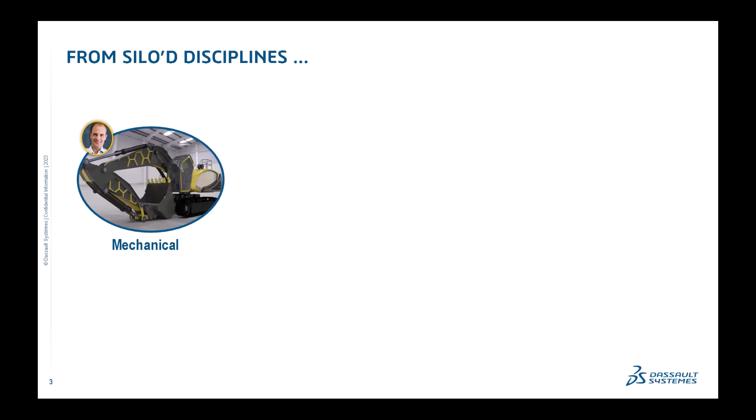Now, let's assume that you are working in an automotive or industrial equipment company, and let's say you are on a project along with some of your colleagues. In this project, there are mechanical engineers to take care of all the simulations related to your product structure. There is also drive, battery, and electrical system engineers, and also a couple of other people working on the same project.

The question is, how are all these people going to work and collaborate? Well, usually the answer is that they are probably going to work in silos, meaning that each and every one of them is going to work on his side with very limited interactions with the others. There are a lot of problems coming with this way of working, for example, integration issues, data loss, many iterations, long cycles. Generally, this is not a very efficient way of working.

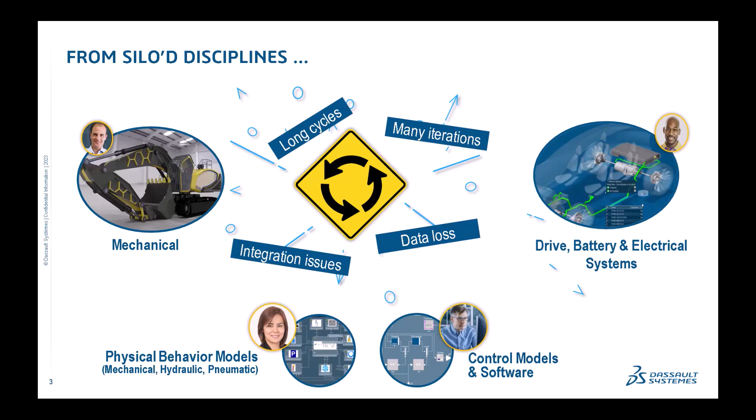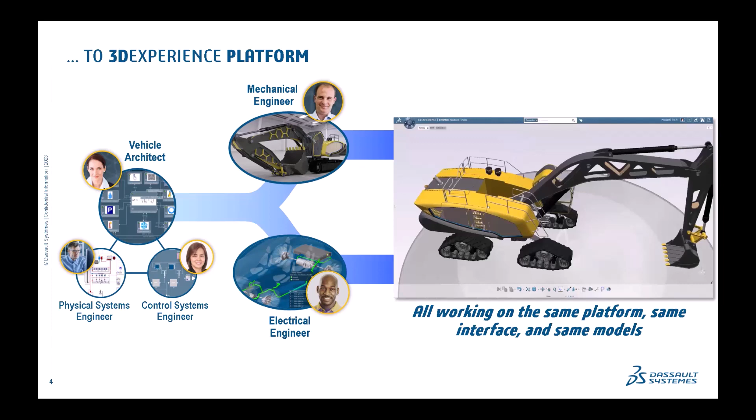This is where the 3DEXPERIENCE comes in. The main purpose of the platform is to connect all these people together, enabling them to work on the same platform, same interface, and same models. This is really the key element behind the 3DEXPERIENCE platform.

Now let's go back to our typical CST user. There are three different types of CST users. The first one is probably the most familiar for you. It's the user that has CST installed on his laptop or computer. He has a standalone license, and basically he uses CST locally to perform various electromagnetic simulations.

The second type uses CST exactly like the first one, but in addition, he has linked his CST to the 3DEXPERIENCE platform via what we call a Power By link. I'm going to go into more details of what this means practically afterwards.

Finally, we have a third type, which uses the Dassault Systèmes cloud environment. This part has already been addressed in a presentation before, so I am not going to really go into deep details about the cloud.

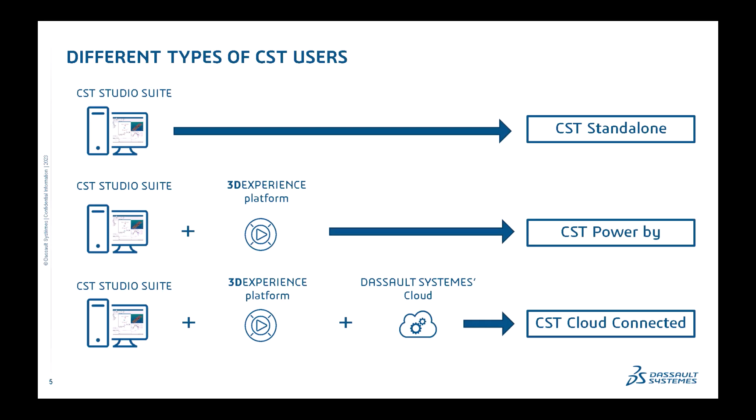So what are the benefits of the 3DEXPERIENCE platform for a CST user? Well, the answer is simple. It enables him to have a direct connection with all of the project stakeholders, going from the 3D designers, simulation engineers, to the project managers. In addition to that, he'll be able to leverage the power of the platform to perform some tasks that would not have been possible in CST.

For example, the DOE studies, defeaturing, simplifications, and other different tasks. This will be, at least a part of this will be addressed in the demo afterwards.

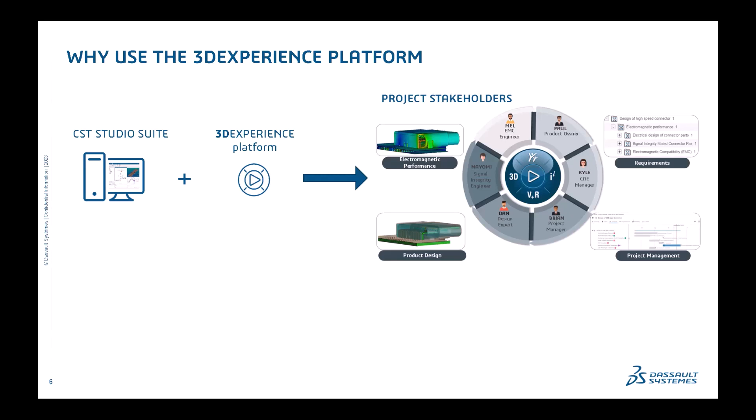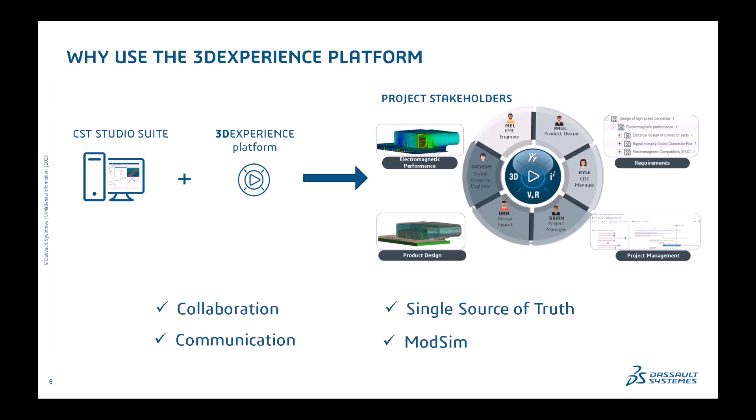This link actually enables frictionless collaboration and communication. It also enables a single source of truth. This means that since everybody works on the same models, all the other users are aware of updates and adjustments in real time. ModSim, which stands for modeling and simulation, is also key because it enables the designers and simulation engineers to work hand in hand on the same product.

So now I will give an example of one CST user that uses the platform, and it starts here with him installing CST on the platform on his local workstation. He's able to set up simulations and review full results in CST as usual.

Now he uses the Power By link to connect CST to the 3DEXPERIENCE platform. This Power By link enables him first to save some CST Studio Suite files directly into the platform to share them with others, but also he's able to load and retrieve various types of data from the platform. And since everybody else is working on this platform, he will also be able to perform various tasks.

For example, he can manage and process CAD models directly in the platform and perform defeaturing tasks, simplification, etc. He is also able to load and view results of the other project stakeholders. And since everybody is sharing their results on the platform, everybody can see the results of everyone else. And finally, he can also get updated 3D CAD models in real time.

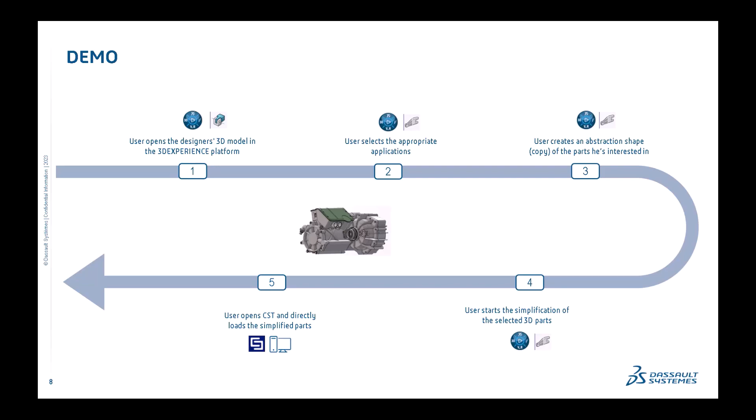Okay, so now I am in the 3DEXPERIENCE platform, and everybody working on the platform will have exactly the same interface as what you see here.

In the top left, this is what we call the compass. When I click on it, you can see I have a set of roles here, and each role gives you access to a set of applications. For example, if I click on the Electromagnetics engineer role, it gives me access to two applications. If I click on another role, it gives me access to a different set of applications. Of course, each person using the platform will have a different set of roles.

Now, the concept of applications or apps that we have here is exactly the same as on your phone. Basically, each app allows you to perform a specific task, and we're going to see during this demo how this works.

On the right of the compass, you have the name of the application that we are in right now. Here, for instance, it's called the Collaborative Lifecycle application — basically, the application that helps you browse through your models in the platform.

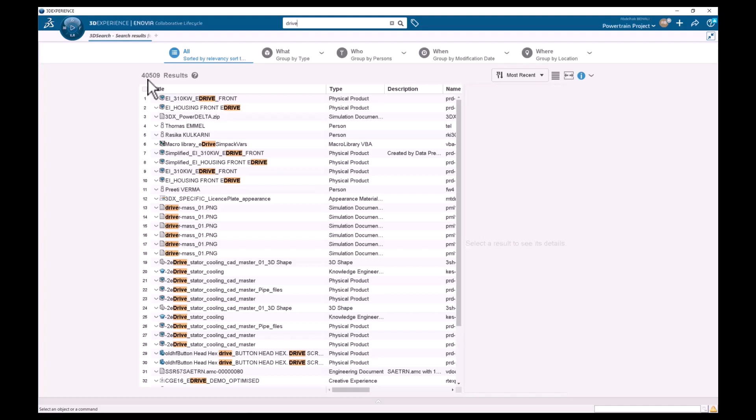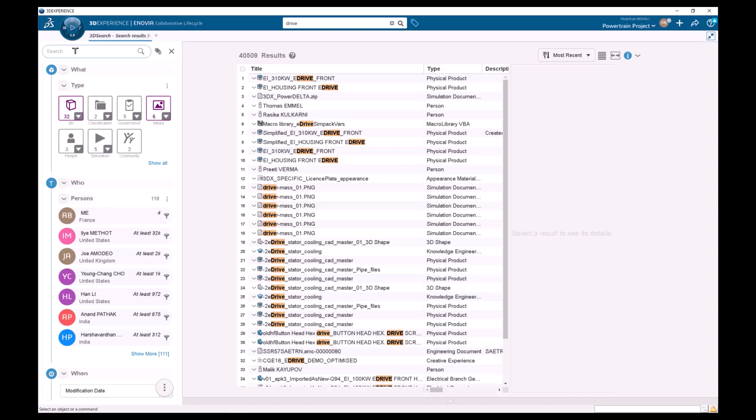To do so, I will use this button here, called the 6W tags, which is basically a filter on these different results. Now I will filter on the name of the designer who generated the CAD model — I'll type his name, Romain Jolet. I got it here, so I click on Romain Jolet. Now I have only two results, and I know that this one is the file I was looking for, so I'm going to open it.

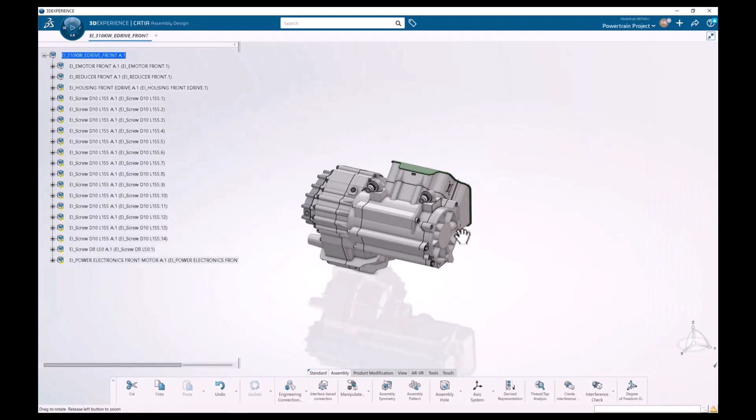Okay, so now I have this 3D model that has been generated by the designer. Of course, I have access, I can visualize the model, and I have access to all the different parts of this 3D model. So now what I want to do is just select a part of this powertrain model and import it to CST.

The part that I am interested in, let's say it's this part here. Keep in mind that this is just an example, and this model can be a car, a plane, or anything. For example, if you are a radar supplier or an automotive OEM, and you want to do integration simulations in CST for the radar, you would just pick a part of the car and import it in CST. You don't want to have the whole car in CST. And this is exactly what we're going to do here.

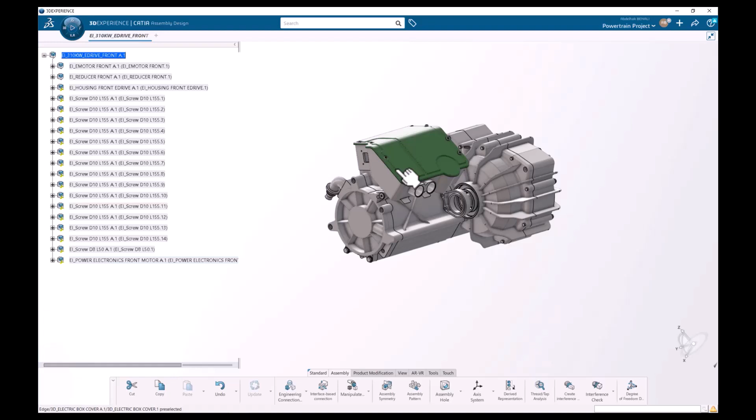So I will just open this small part in another tab. As you can see, I am on another tab, and I just filtered the part that I am interested in. Now, as you can see, we are in the application CATIA Assembly Design. Keep this in mind, because from here I can directly import this file into CST, but I will not do this for the moment.

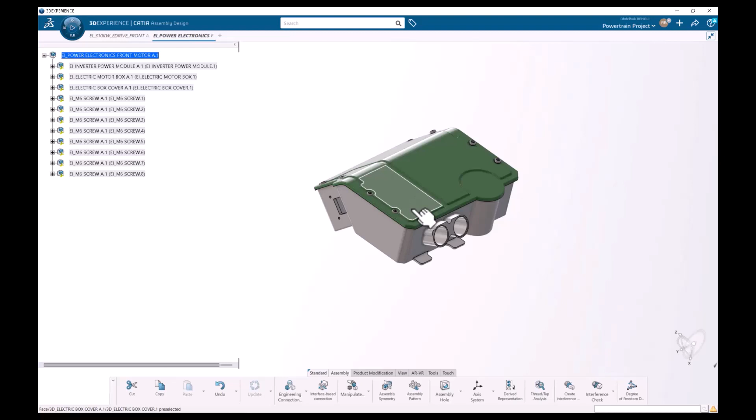What I'm going to do is try first to simplify this part and defeature it. Simplifying and defeaturing is not always required, but sometimes you have really complicated, complex models that have small features that are not really necessary from an electromagnetic simulation point of view. So you want to get rid of these small parts because they will generate unnecessary meshes and make your simulation really heavy.

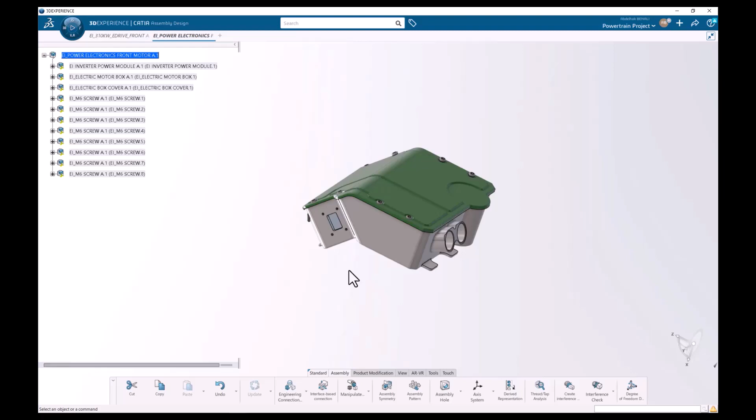So this is what I'm going to do. But before that, keep in mind that this CAD model is not owned by us, so we cannot really modify it. So what we are going to do right now is create a copy of this CAD model.

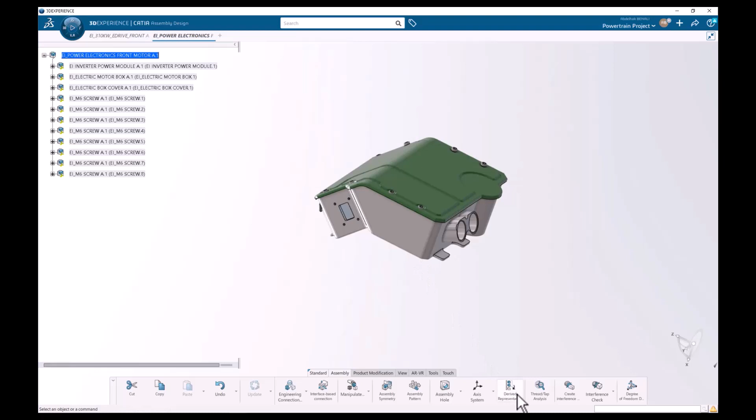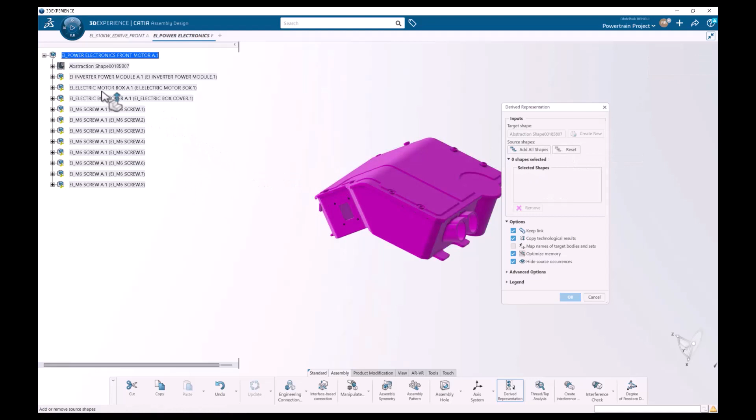To do so, I just click here on Derived Representations, Create New, Abstraction Shape. Abstraction shape in the platform is basically the same thing as creating a copy and working on it to do some modifications. So I will choose the parts that I am interested in, just these ones, the parts that are here highlighted in pink. I click OK.

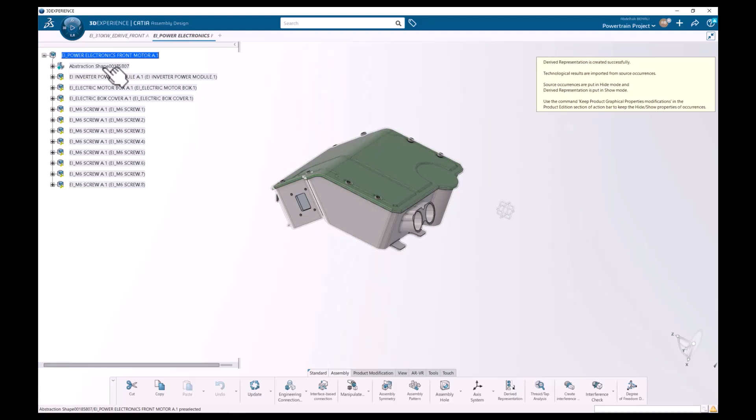And now, as you can see, it has created the abstraction shape, the copy, and I'm going to work only on this part. So let us just rename it for convenience, and I will call it, for example, simplified box. As simple as that, okay.

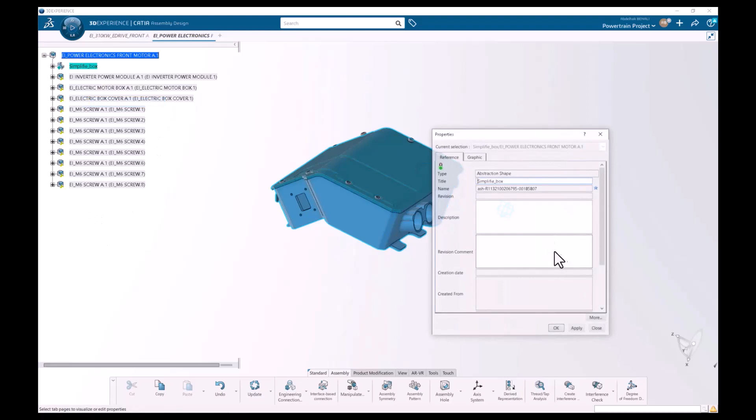Now I forgot to add a D. All right.

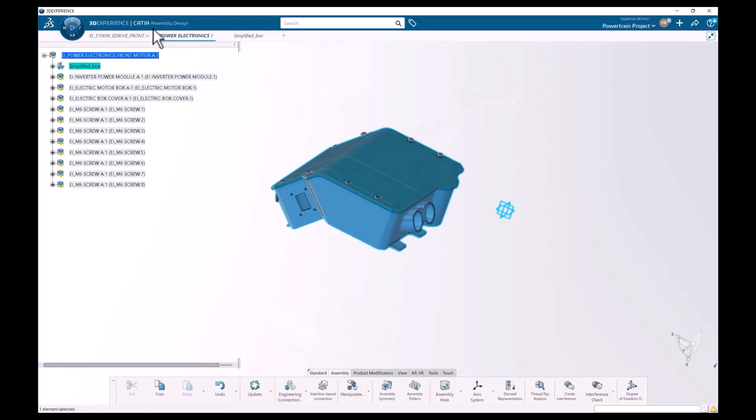So let me open this abstraction shape alone because I don't need the rest right now. I just right click on it and open it in a new app. And now, if you remember, just before, if I go back, we were in the CATIA Assembly Design app. When I open the simplified box here, the abstraction shape that I just created, the platform automatically changed the app.

Actually, Simulation Model Preparation is the app that we need to do simplifications. What happened here is that the platform understood directly - it understands basically that when you create an abstraction shape, it assumes that you are going to perform some simplification on it. So here you have an automatic process of application changing.

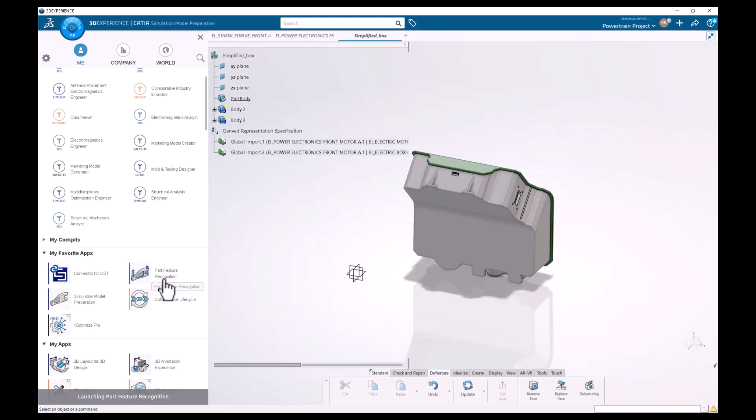Of course, you can do it manually. It does not always work like that. For example, if I want to change the application, this is really simple. I just click on the compass and click on part feature recognition. And as you can see, I can change the applications as simply as that to perform different tasks.

Of course, this application - what are the differences? You may think, what are the differences between the applications? Well, basically they just give you access to a different set of buttons here on the bottom. So as you can see, when I go back to Simulation Model Preparation, the buttons that are here in the bottom just change.

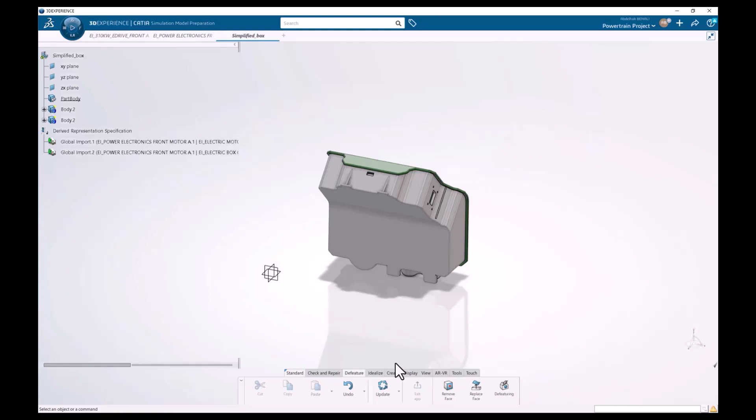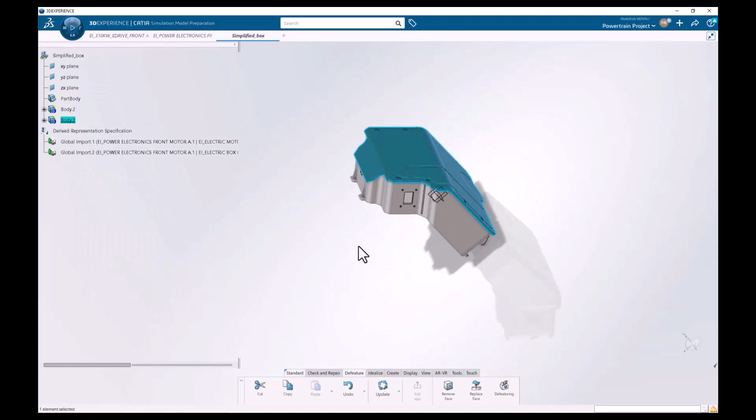So now I am in the right application, and I have the right to modify the model I'm in. So this is exactly what I'm going to do. First, let me just focus on this part here. Of course, I can do everything at once, but let me hide this one so that it can be clear for you. Okay, so I have this part here, and as you can see, it has some complexity on it. Of course, you can encounter some much more complex part than this.

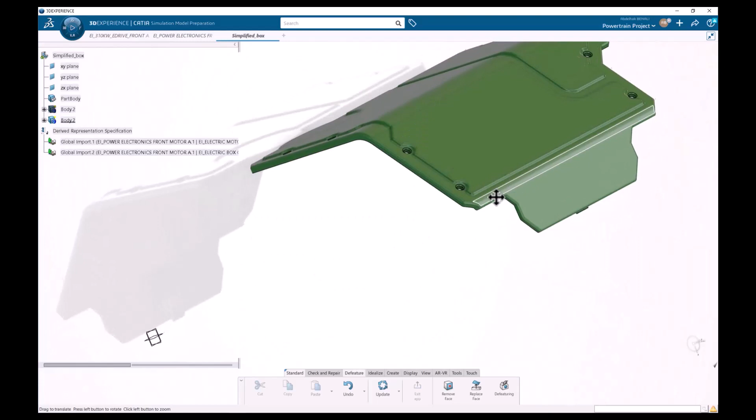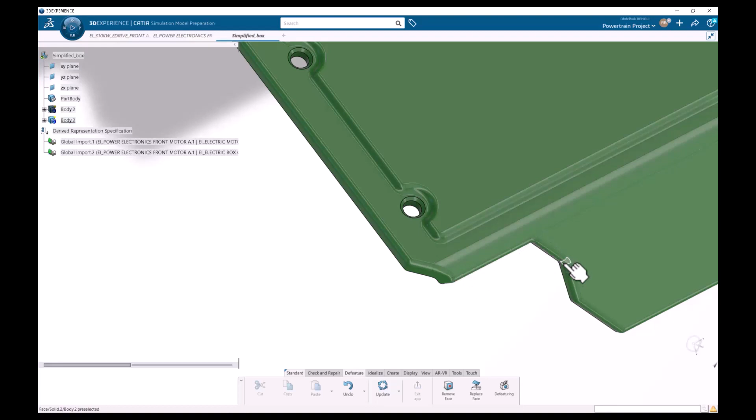We can notice that we have some holes here. Holes generally are not really important from an electromagnetics point of view, so I'm going to try to take them out. We have fillets here also that are not really necessary from an electromagnetic point of view, so I'm going to try and take them out.

So I click here on the defeaturing, and now I will add some filters. For example, I will click here on hole filter plus, and then basically here what I'm telling it is that I want you to remove all the holes that are between 0 and 10 millimeters in diameter. This is what I'm asking it to do. I click OK, and as you can see, you have a new line that popped up.

It's one of the filters that I just added. I will add a second filter, which is the fillet filter, and I will do exactly the same. I will ask it to remove, let's say, all the fillets between 0 and 5 millimeters in radius. Okay, and I have my second line here. And I click OK.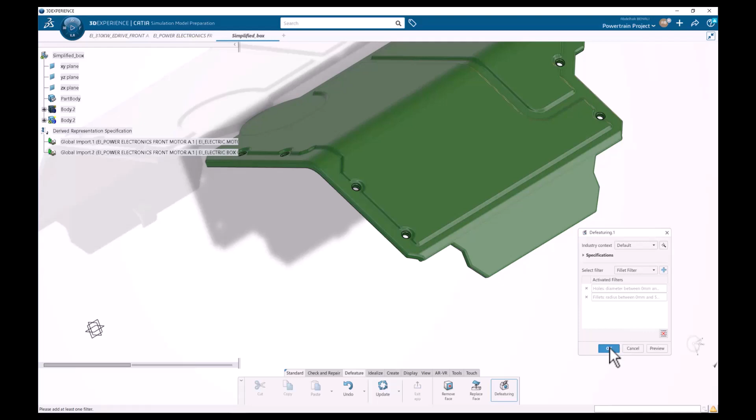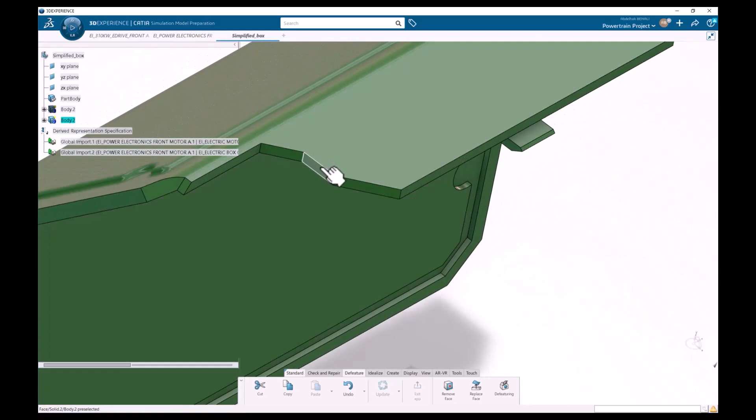Now, as you can see, all the holes that I had in my model here were taken off, and the fillets that I had here also disappeared. So this is a good start to my model. It's a good model, but I want to simplify it even more.

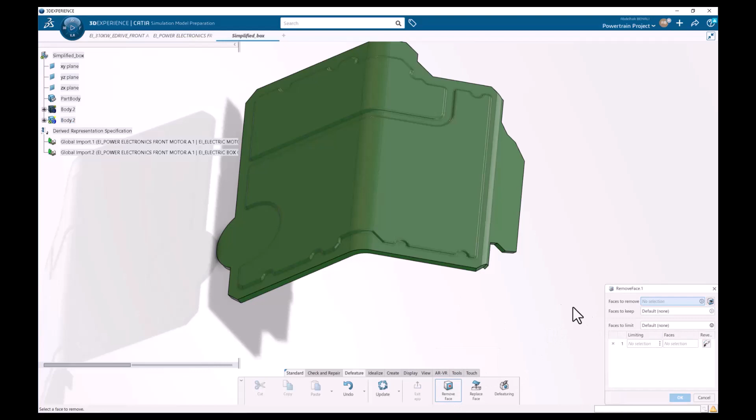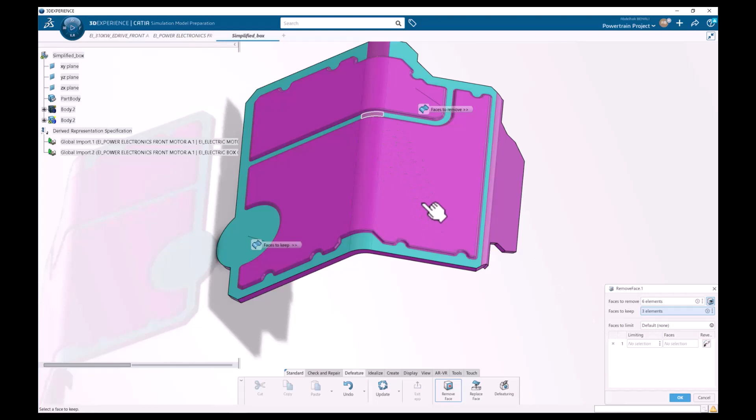So you see that I have a bit of complexity here on the top. So I will try to simplify it. I click on remove face and I will ask it to remove these faces. Okay, and here I click on the face that I want to keep. Okay, there is this face that I want to keep also, and this face. Okay, and now I will try to click OK.

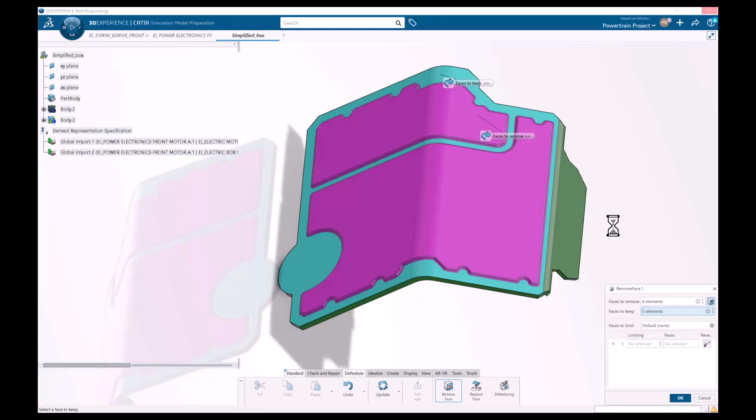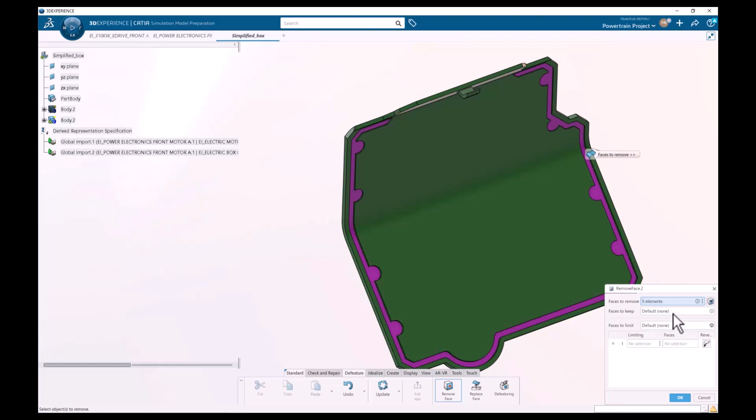And now, as you can see, I really have a much more simple cover for my box. I can do the same thing on the other face. Okay, let's do the same. Okay, I want to remove this face, this one, like this, for example. And these are the faces that I want to keep.

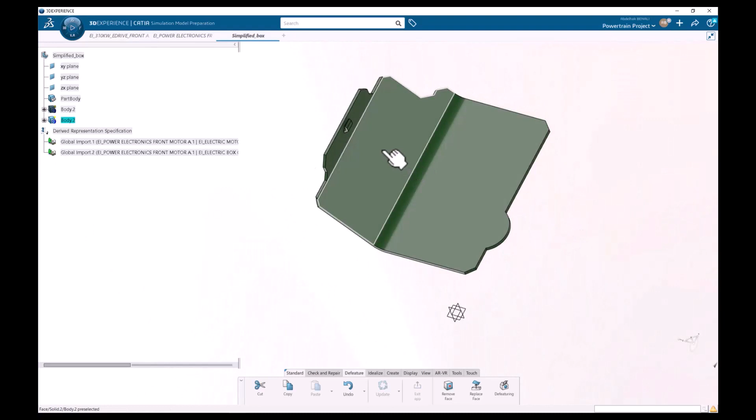Okay, hopefully this will work. Okay, click OK, and this worked. As you can see, we have a really simple cover right now compared to what it was a few minutes ago. Let me remove this face also. Okay, can remove this feature also because it's not really necessary.

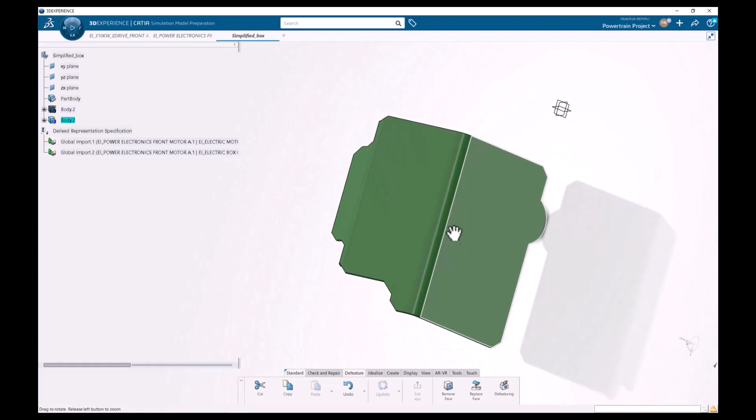Okay, so now I'm happy with my cover, with my simplifications, and I can do the same things with the other part, which is the one that I just hid. Let me hide this cover, and now I will do exactly the same things. So I will apply some filters here. I will try to go fast because the process is the same as what we did before. Okay, the fillet. I click OK. Oh sorry, yeah, I need to click here, and then it should work.

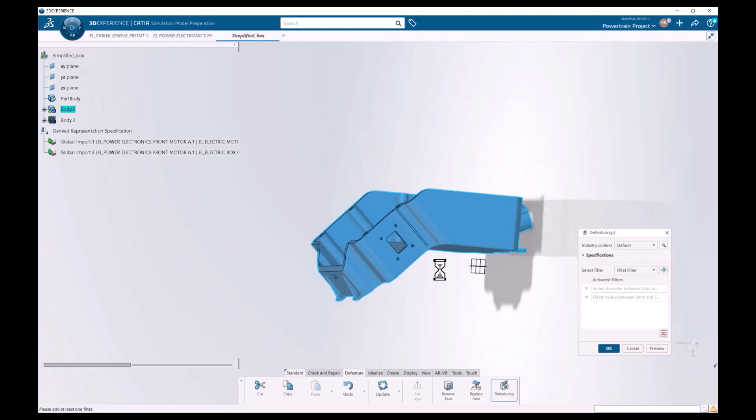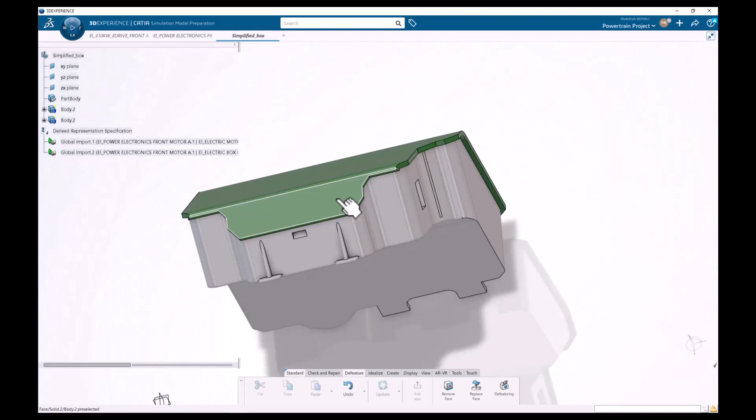All right, now, as you can see, I have a simplified model here. All the holes, the small holes have been suppressed. And let me just show the other part. And now I'm happy with this model. I am happy with this model and I want it to be imported in CST. So let us save.

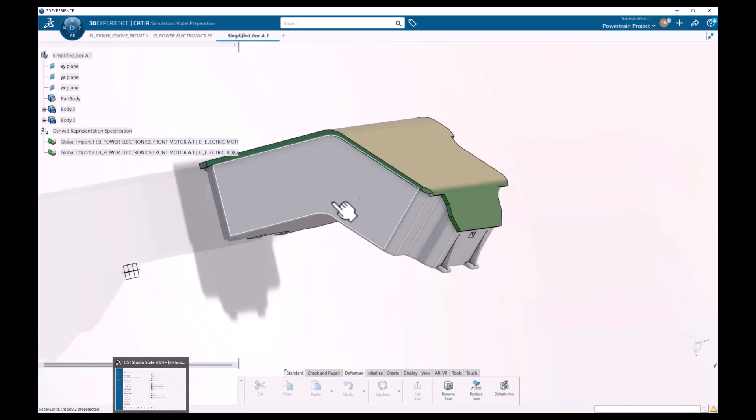Now my job is finished in the platform. I don't have anything to add. So I will go now into CST and I will try to import this file. So let us go to CST.

Of course, in CST you have this, this window, the first window that pops up in CST. And here I have this button, 3DEXPERIENCE, and this is the one that I'm going to use to import data from the platform. So let me click on load.

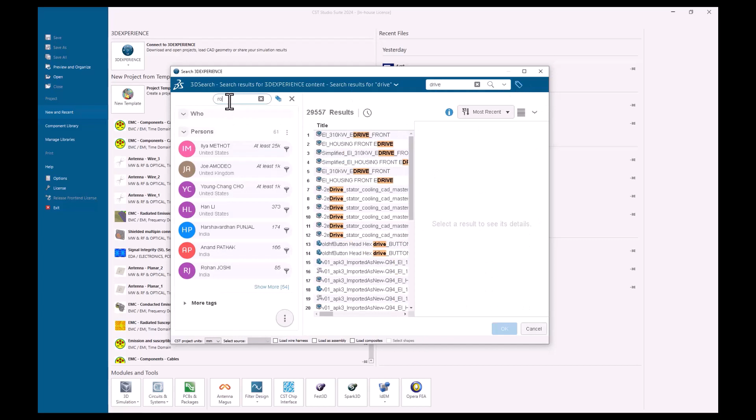And then here is, you may recognize this, it's the same search bar that we had earlier. So I'm going to repeat exactly the same steps. I'm going to type drive and filter on the designer name. And then I have found my file. Okay, so I can select it here. And before clicking OK, I will go here to select shapes. Let me just make it bigger. So I click on select shapes.

So now, as you can see, all the shapes of the powertrain model can be imported in CST. Of course, this is not what I want to do. What I want to do is just import only the part that I defeatured.

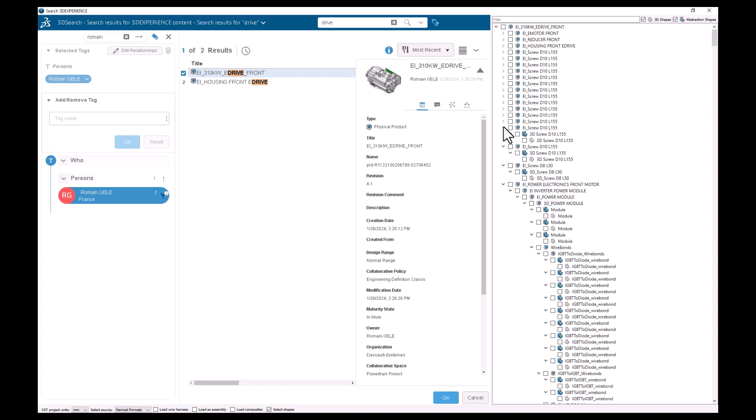Let me just unwrap this tree, and hopefully we will find the files that we were looking for. And in fact, I'm just seeing it. It's here. It's a simplified box. So this is the only one that I want to import.

Of course, I can also import the non-simplified models of the box. We can do that also. So I can click on this to see what's the difference between the two models. Now I click OK.

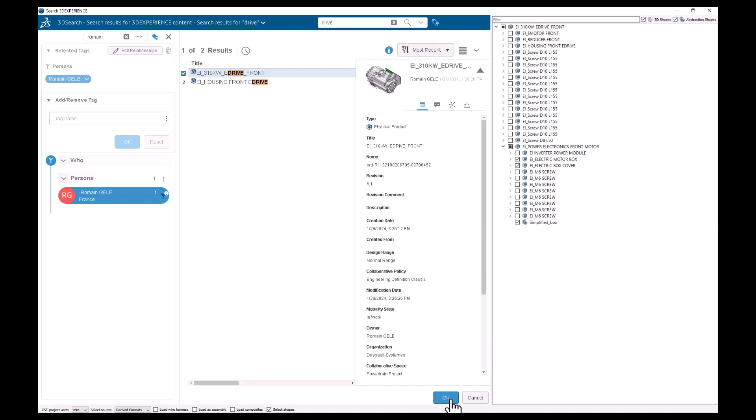Now it is asking me to save the model locally in CST. So let us define box. Okay, let me save it just here.

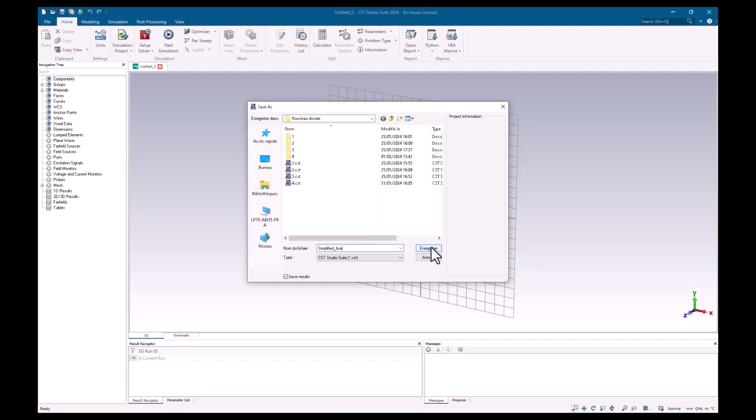And now it is downloading the geometry from the platform. As you can see, I have my model now in CST that I can see.

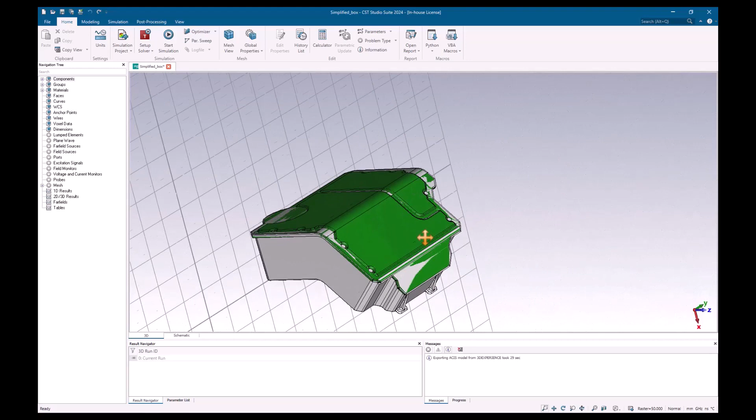Of course, since I imported the simplified and the non-simplified models, there is a bit of overlap here. So let me just first hide the simplified one. As you can see, this is the model that has been uploaded by the designer, the original model.

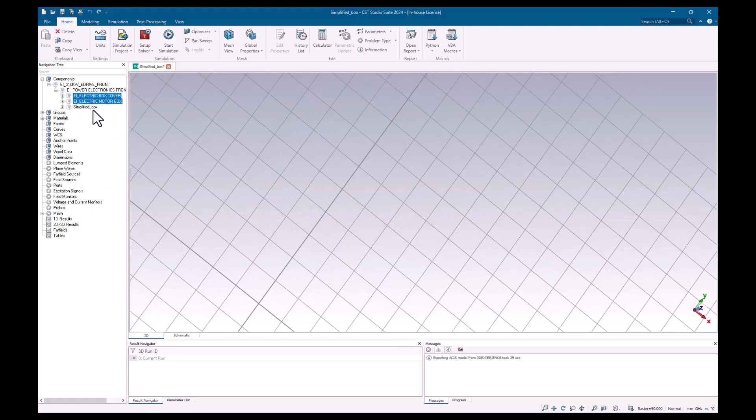And now if I hide this and just show the simplified box, as you can see, I have my simplified box that is imported in CST with all the modifications that I did earlier. And from here, of course, we are in CST and we can do whatever we want for the simulations.

So this is the end of my demo and presentation overall. Do not hesitate if you have any questions to ask, and I will be more than happy to answer them. Thank you very much.

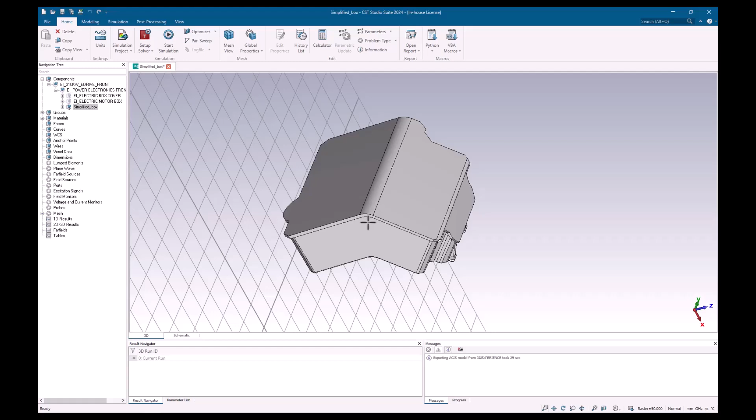Thanks. I would like to complement a few things on this very nice demo from you, Abdelhak. So we've seen earlier already the potential usage of an existing CST user for the 3D Experience platform, that you have this holistic view on product development with requirements, project management, and so on. So you've seen that it's about collaboration, single source of truth, communication, and modeling and simulation.

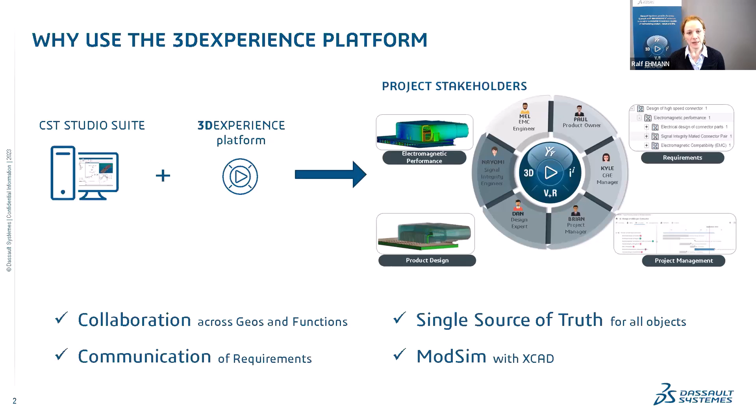And in more detail, I would like to highlight that it's across all geos and functions. The single source of truth does not limit to CAD data, and you can transparently communicate requirements, and you can do ModSim, meaning integration of modeling and simulation, also with non-native CAD data, meaning non-CATIA data, which I will show you in a few seconds.

So first of all, let's have a look at the requirements. So as you see here, the requirements basically are edited in a web-based environment. This is kind of a web-based version of the 3D Experience platform, which is quite easy to use here.

And you see you can define the requirements from very high level, meaning just a very brief description on what you would like to achieve, but you can go more and more into details and finally define really values of your electromagnetic properties, for example, the insertion loss here.

And then you can also see who's the owner of the requirement, and you can also see if the requirement is up to date or not, because requirements are living objects which can be life cycled as well.

You can see here also the return loss, and the same as well. You can have very detailed requirement values, which then can be used also later on to judge if your simulation result is valid or not, because these values which you enter here, we will connect later on to the simulation result.

So that's the start of every development process, the requirements. But of course, thinking about that 40% of the product development cost go into tests and verification, testing is actually quite an important part of your development. Therefore, if you can optimize that part, you also save some time and cost.

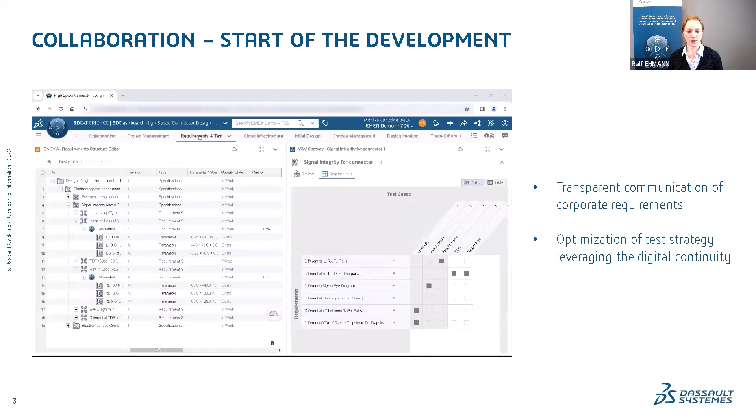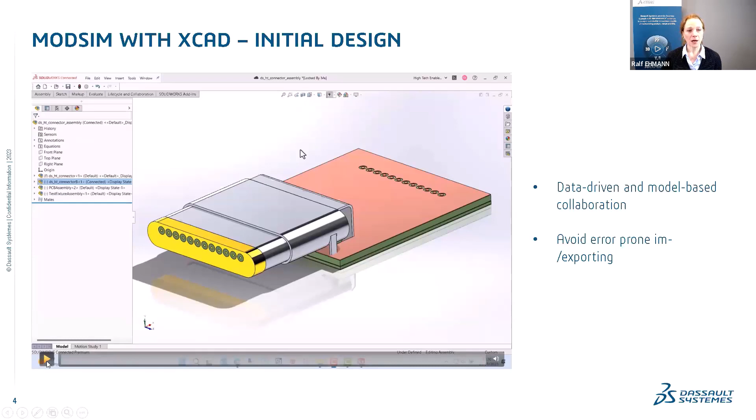The next thing is that modeling and simulation are very tied together. We know that many of our customers, especially in high tech, don't use CATIA but have a SolidWorks structure, but still the same applies. You can still work data-driven and model-based via the 3D Experience platform so that you avoid error-prone importing and exporting.

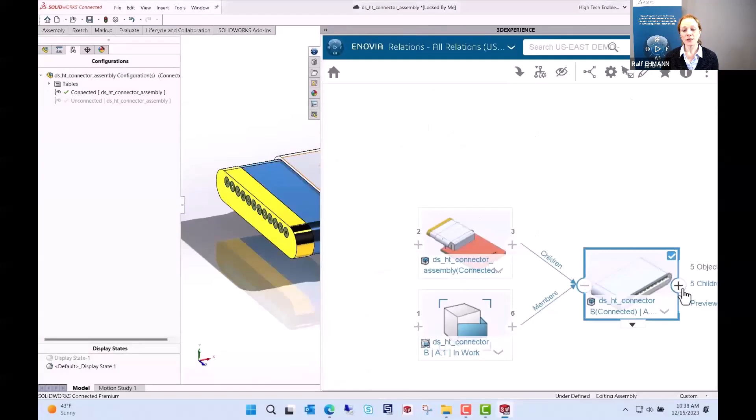So here, for example, we see a structure of the USB connector, which is open in its native or original CAD data. It's directly connected to the 3D Experience platform, where you can see the attributes, and also the relations of the different objects on the platform. That often is quite nice.

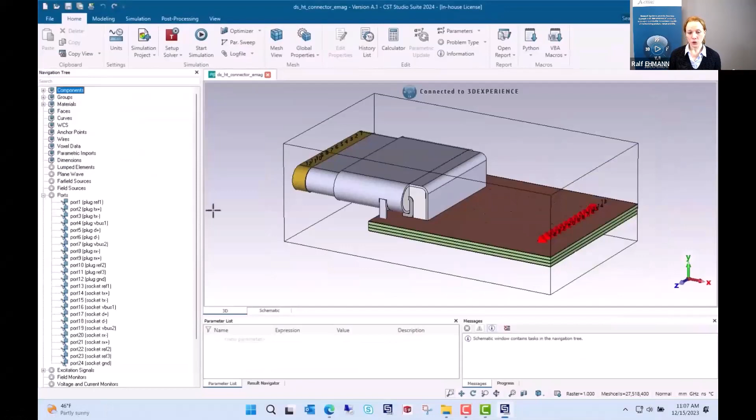You can open the model directly, as we've seen earlier, in the connector for CST, depending on if you have COS or the platform. Then you can set up your model as you're used to. You set up ports, etc., and verify that everything is ready to be simulated.

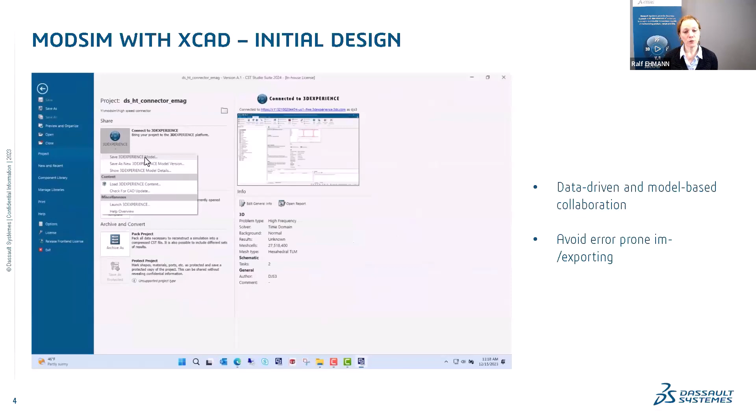And then you can basically upload this or connect it to the 3DEXPERIENCE platform. You save the simulation object to the platform, and by that you have direct continuity between the CAD model and the simulation. That becomes important once you perform a change. For example, we have now, by an initial simulation, found out that we need to shorten some of these pins of the USB connector.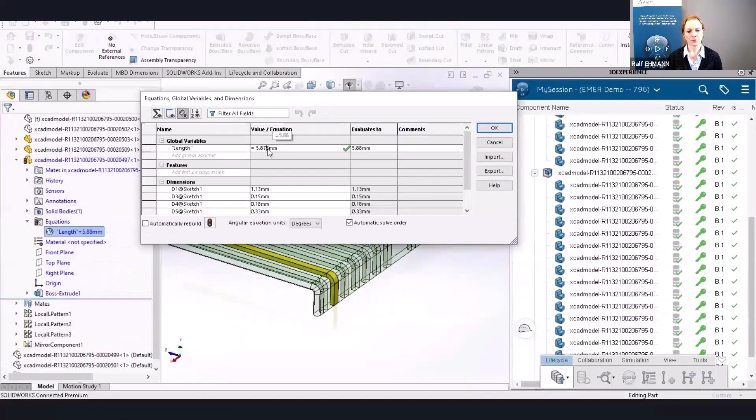Then we can go back to its original CAD file and change, for example, the value of a formula here, or just the value of some connector's pins. So we see that some of these pins are shorter than the others. You see also that the status is out of date, but we can save it as a new version, as an improved connector version, and save it on the 3DEXPERIENCE platform.

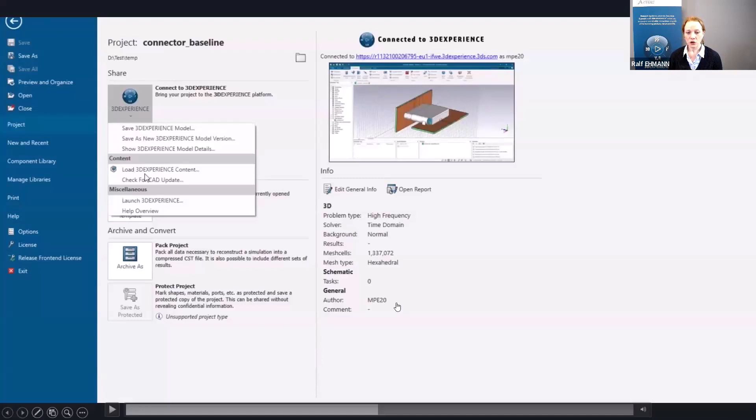Now this is a tricky part, which we should stop here. You see that in the simulation you've set up earlier, you can ask for a CAD update, to check if anything is new. You haven't changed your simulation file before, so far, you just check if you have a CAD update, and it notices that something is out of date. You can directly re-import this without having to change any settings, so the ports are there and so on.

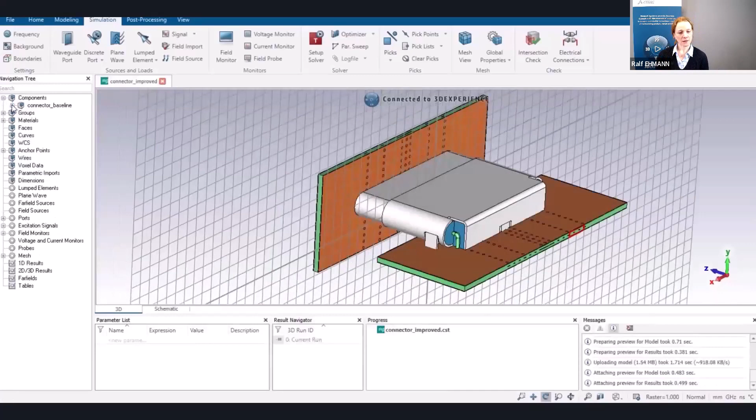And then, of course, you can re-simulate it. Once done, you can also save this one to the 3DEXPERIENCE platform. Of course, you can before also check that it's the correct model, and save this new version of the simulation to the 3DEXPERIENCE platform.

So that means you get notified when you have an update to your CAD data, and you're always working on the latest model. You don't have these exchange, export and import issues. I know typically we have tons of files on our hard disk, and after a while you don't know anymore if it's version 7 or 7.1. So you're always working on the latest version.

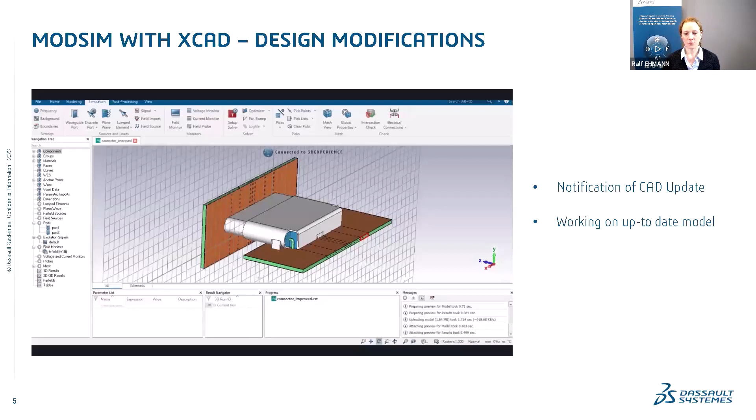So now we have uploaded the file on the platform, and I would like to show you a bit on how it looks and what different objects you have on the platform. We also see how to connect the results to the requirements. So let's open the 3DEXPERIENCE platform again.

So I'm searching for my connector files, basically for everything called connector. You can also change if you want to sort for relevancy or for latest. I typically like to sort for latest.

Here I would like to show you what you actually see. The ones with the gear wheels are simulation objects, basically CST files. Then you have these bricky things, which is the CAD data generated before by SolidWorks, CATIA, whatever. These things here we will generate later, so this is up to come.

I see basically here all the connectors required under my name. This is very nice because in principle I can share this data with whoever has access to the cloud, meaning I can share it across functions and across geos. For example, I had to work with a colleague based on the West Coast of the US, but I don't have to wait for him to come to work before I can start my simulation, because it's on the platform and I can just take it from there and search for it.

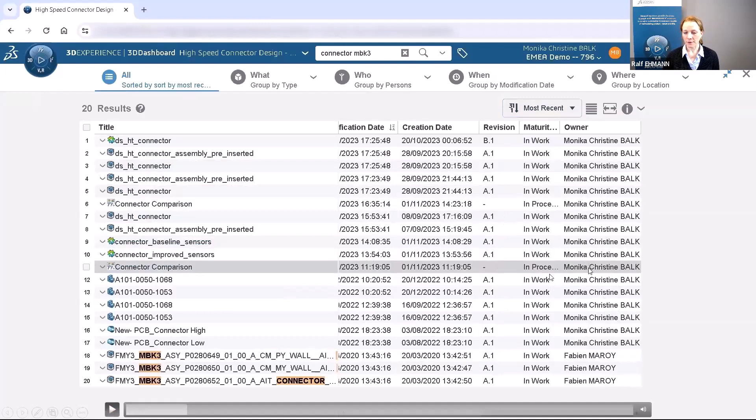So let's continue. You see here I have my two simulation runs. I also have the option to revise some things. You see here, these are my files, and then I can have a look at the simulation results on the platform.

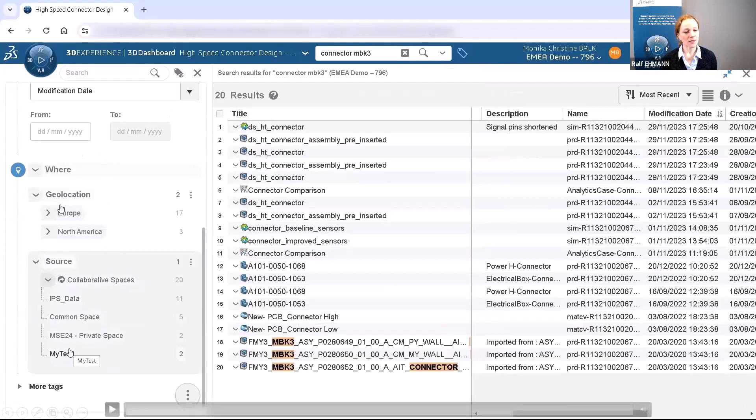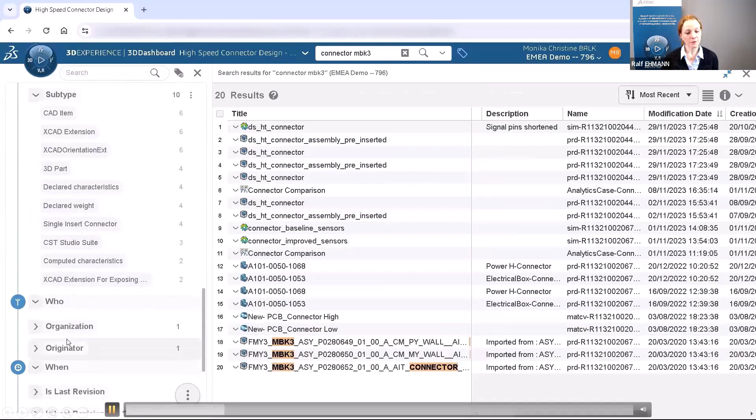This is also kind of interesting, you can tag for lots of things, or you can search for many things, which is really nice, especially if you have to find your specific file in a quite big amount of data. You can search for the geolocation, for a collab space, but you also have more tags like the type, so am I searching for a CST file or for whatever SolidWorks or Creo file. All this is possible and makes life much easier than on a file-based system.

So let's now compare the two results. I do this, you see here, this was just a generation of a web-based so-called widget. So basically I take an app and plug it into the dashboard here, and this app can compare different simulation results.

So I will now search for the two connector simulations which we have generated before. Again, I search for connector and my name, and I see the two results. Then I open it, and now I'm creating a so-called analytics case, basically a comparison case between two simulation results.

And this sets up a table, which then looks like that. Of course, maybe it's not such a wow effect if we just have two results, but if you imagine you can do the same with more or less the same number of clicks even if you have 10 results, then it can be quite nice to get an overview on which one is the best.

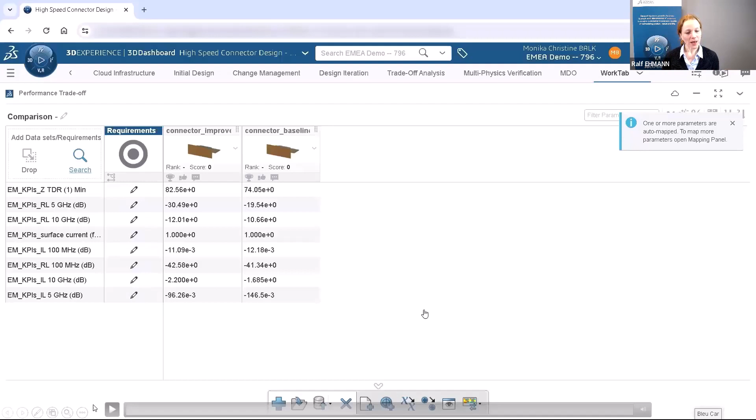So you see here in this column we have a requirements column. Here I could in principle manually say what should be the target, but I can connect it to the requirements which we introduced earlier. So I can now search for the requirements, which were actually generated by my colleague David, and I search for them. They are in a different collab space. Once I have them, you see the requirements for the return loss and the insertion loss, which we introduced at the beginning. You see, I can directly connect them to my simulation results.

By the way, here it's maybe interesting, the KPIs which are shown in the table already are basically result templates, which you know from CST, so you can have every KPI you want. Now I can say I connect them to the requirements, and as soon as I do so, I have the targets available, and now you see quite nicely which one is the best.

As said, if you just have two, it maybe is easy to do just by looking at it, but if you have maybe 10 or more, then it can be a bit more complicated. You see also directly if a requirement is violated, then you have these little exclamation marks, and you can also see what the requirements are actually specified.

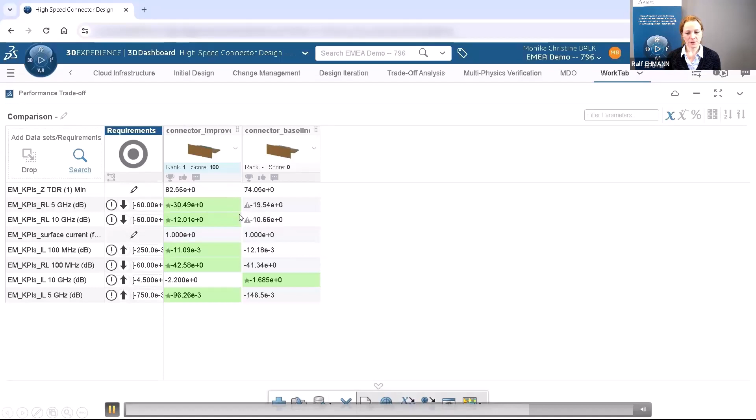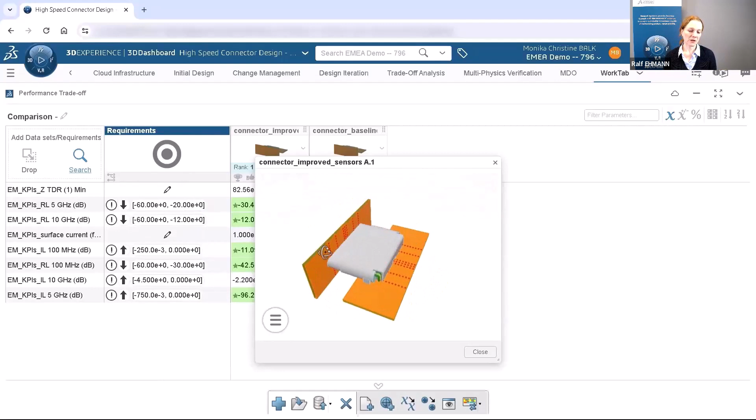And if you like one example, as shown earlier by Hilary, you can view it in this web environment. You can check the sensors, meaning the results in 1D, or also choose the 3D results, which are light, so you can view them on a phone. Maybe this is important.

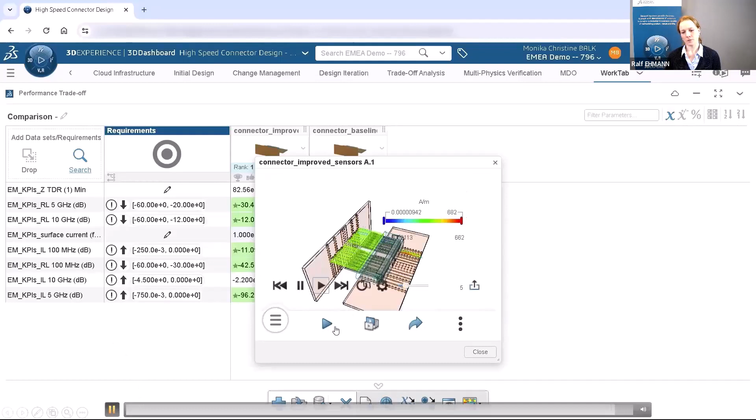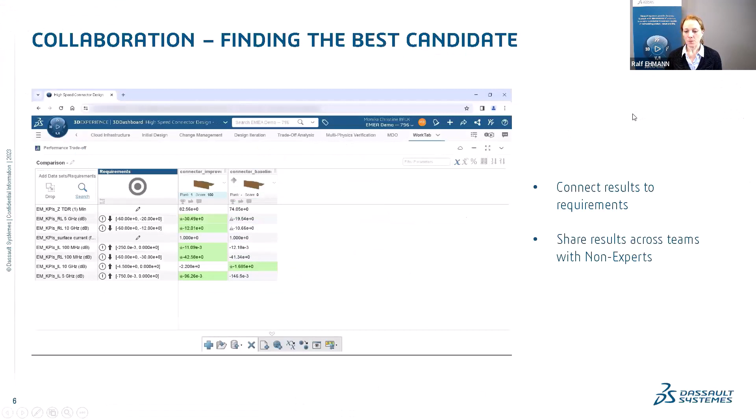One last feature I would like to show you, because I think it's a cool inbuilt functionality of the 3DEXPERIENCE platform, is the so-called relational explorer. In principle, the platform always knows who relates to who. You've seen earlier that I created this so-called analytics case, which was the comparison of the simulations.

So if I, for example, look for it, you see here all the different types of objects I can look for. Obviously I have lots of stuff on the 3DEXPERIENCE platform. So I now look for my analytics case of the connector comparison, and I can say, okay, what are the relations?

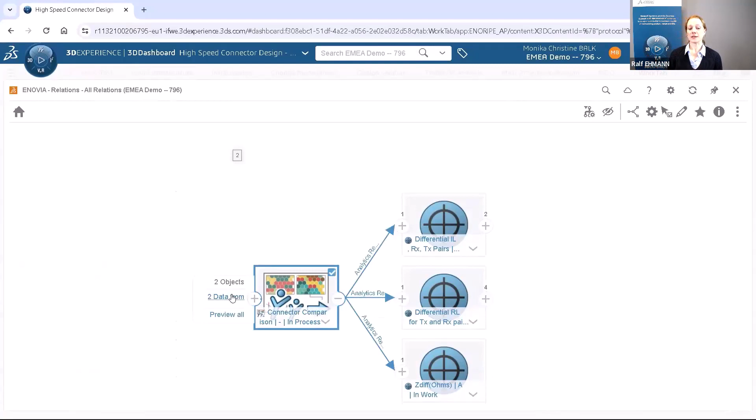Then you see here the object, the analytics case, the comparison, and I can click on what are children and parents, and you see that it relates to the requirement and that it's actually loading the two simulation results. So you typically get a very nice overview of what is actually connected.

With that, I hope you had some fun and learned something new. And I'm finished with my presentation.